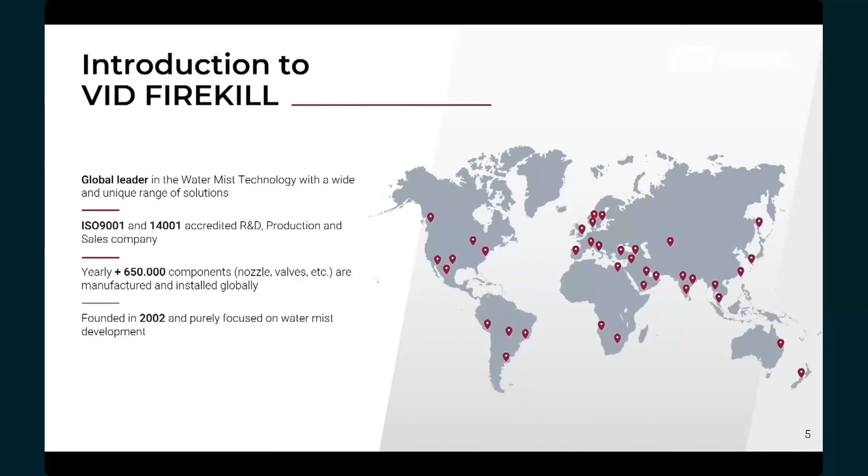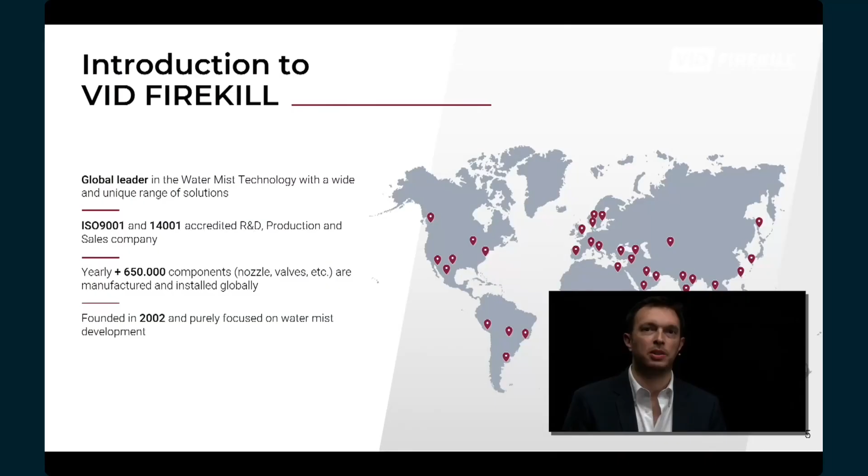So as I said, we are VID Firekill, a global leader in the water mist industry, working for more than 20 years, purely focused on low pressure water mist development. The company is wide and full of all the ISO approvals needed as a global manufacturer. Just to give some numbers, we are producing almost 650,000 components, sold and installed every year globally.

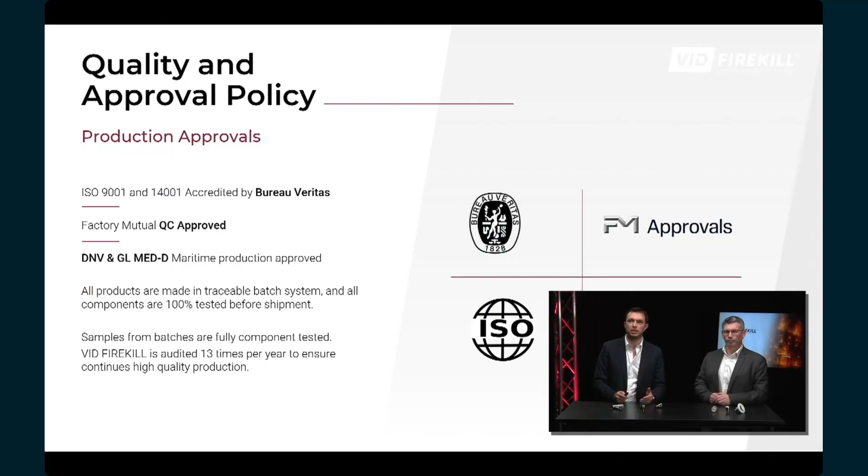The company is purely focused on a strong quality and approval policy. Apart from ISO, there is a strong relation with FM Approvals in terms of quality, testing, and research and development, but also within the same specific product, because all products are made in traceable batches and are all 100% tested before shipment.

That means that for a customer, it's a wide and reliable technology in terms of quality and performance in general. Just to give some numbers, it's audited around 13 times per year by different auditors to ensure the best performance in terms of quality and performance.

Giving some numbers, it's approximately 13 FM approvals, different DNV approvals, mainly for marine applications, but also VdS approvals, mainly covering EN14972 in Europe, but also civil defense approval covering the Middle East.

Apart from the approvals and the product, the company has a strong commitment to the industry in terms of participating in standardization, being an active part of CEN, NFPA, and IMO Solas. As a company, as a manufacturer, we truly believe that being part of the industry means also being part of the standardization process.

But also being part of committees and associations, like being part of the FM Approval Manufacturer Advisory Council, being part of IWMA, representing water mist globally, being part of the European Fire Sprinkler Network, but also FSSA in the United States.

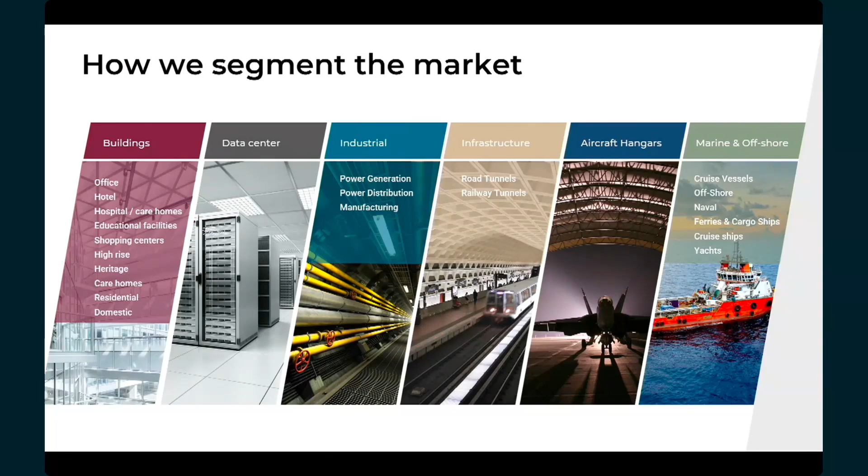This helps the company be an active part of the industry, but also be able to be part of different markets worldwide, like buildings, offices, hospitals, wooden buildings, historical buildings, heritage, data centers, industry in terms of power generation, power distribution, manufacturing, road and railway tunnels, aircraft hangars, but also marine and offshore. So it's a wide, extensive range of products present worldwide, working in different kinds of markets and applications.

But now I think it's time to go much more into the topic, and I want to leave the stage to my colleague Olivier. If we look at FM, Olivier, why is FM really key and why is FM really important in terms of standards?

Yes. FM is the main company to test water mist.

So, because it was the first one to create the test, the protocol test is the FM 5560. It's the protocol where you can find a full case test for a lot of things. I will introduce this after.

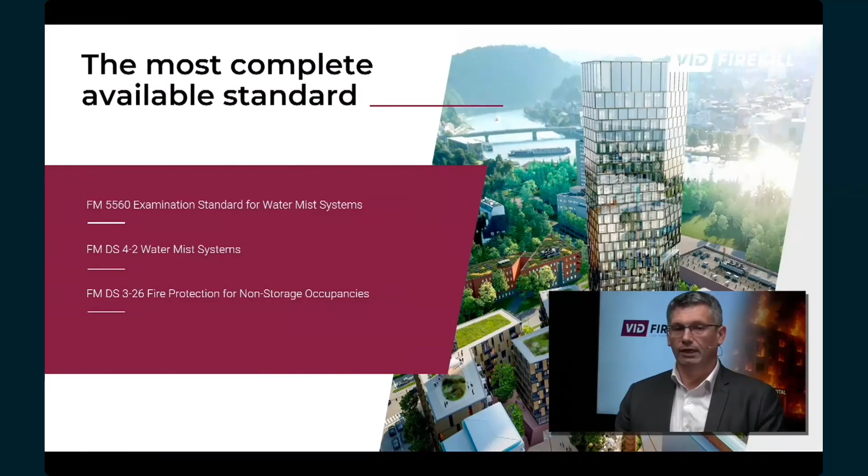And FM also has a lot of data sheets. Data sheet 4-2 is mainly for water mist, for the product, but also for the design, installation and after-sales activity. There are also data sheets for the application. Yes, this data sheet is the 3-26. It's really important because you have the classification of all the risk for the building.

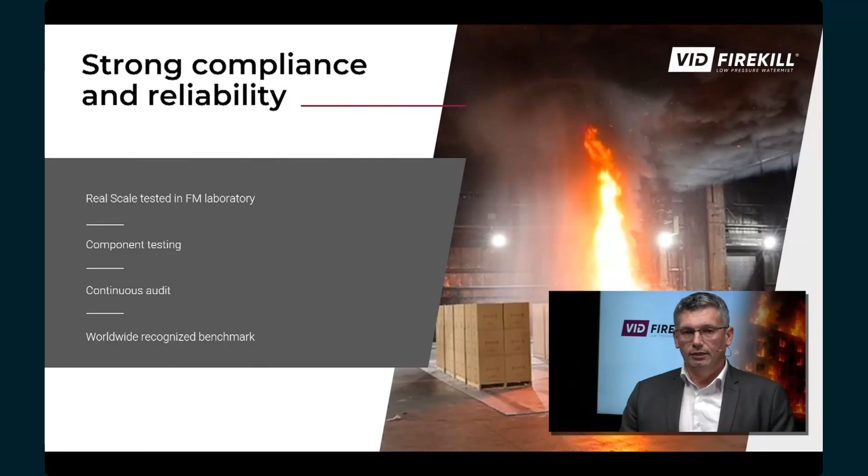So FM also has all the premises to do the tests. You can do the fire test for the component, and it's also an auditor company because they go to the factory to control if all the process for making nozzles, making pump units, is in accordance with FM. And FM is the main assurer over the world, totally recognized and a benchmark for all the other assurers in the building industry.

So now let's go more in depth for hospitals. The benefit of using water mist for hospitals is really significant. You have the benefit of saving the people, the patients and the persons in the building. It's really important, and it reduces the smoke emission because the water mist starts at the beginning of the fire.

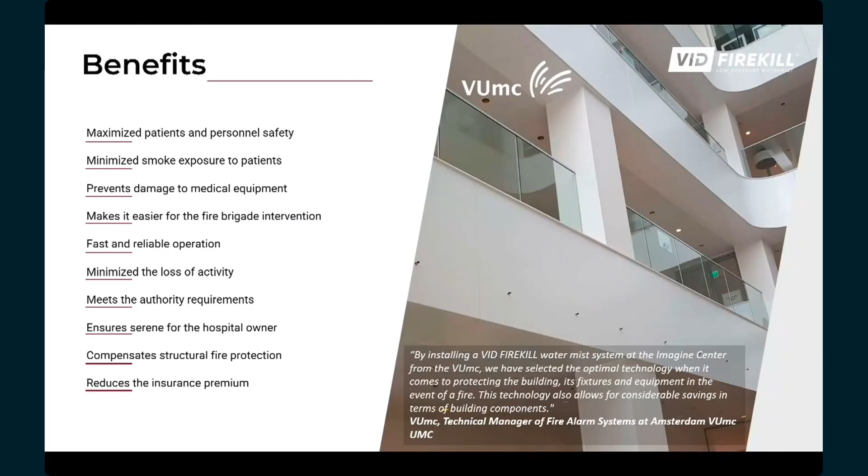And as it starts at the beginning, the fire is too small. There is less smoke, and smoke is the main thing that kills people. So if you reduce the smoke, the people and the patients are safer.

It's also good for the owner, because the owner has more confidence in the building when there is water mist installed. It's also good for reducing water damage. When you have protection on the building with a water system, water mist is the best because there is less water used.

Also for the insurance, it reduces the cost of the insurance. And depending on the country and its rules, you can reduce the smoke extractor, or you can use the water mist to replace the smoke extractor.

And it's the same for the structure, for the fire resistance of the structure. If you know, hospitals are sometimes very old buildings, so you can use water mist to compensate for the fire resistance of the building. Maybe I've missed some benefits, Ricardo.

Yeah, but this is great, and you see the benefits are really amazing on that side. It's not just unlocking different benefits in terms of fire protection, in terms of water saving, of course. But I think the main topic you touched on is the most interesting one: the management of smoke, the activation when the fire is not that big, the faster reaction against fire.

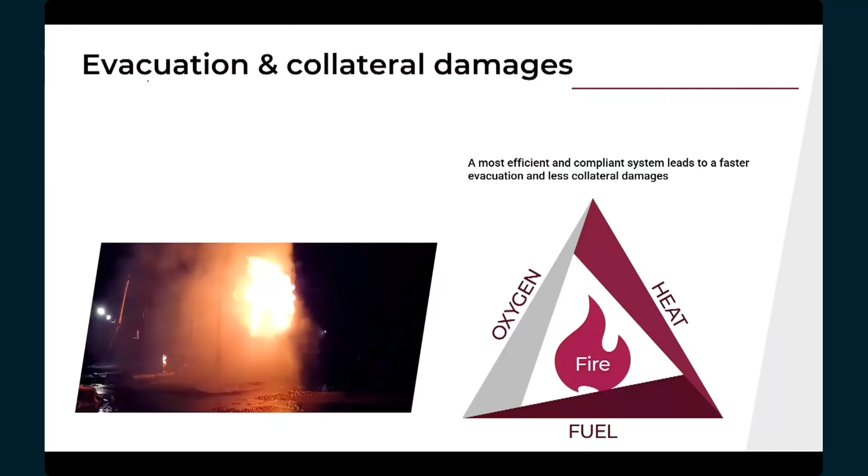Because if we think about sprinklers, we think about just absorbing heat energy from the fire, using water, which is the most known element in nature for absorbing thermal energy, to absorb heat and control it. When we use gas suppression, we mainly reduce the oxygen. But when we use water mist, we work on both sides of the fire triangle: we absorb heat from one side, but we also stop the oxidation. That means being able to be much more reliable, much faster in control and suppression.

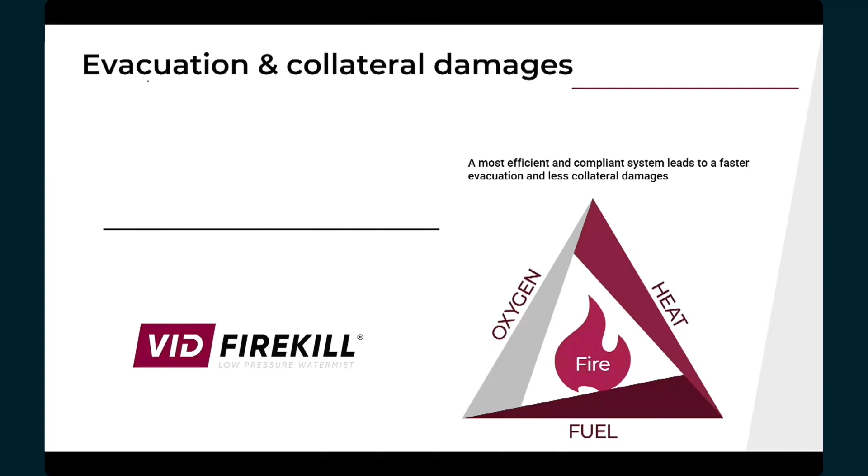At the end of the day, it means evacuating, it means controlling smoke, it means controlling fire, it means preventing collateral and structural damages. So it's a wide, extensive range of benefits, of course. And now, thanks to FM, with the new approvals released by FM in Appendix P, the HC-2 and HC-3 are unlocking the chance to really swap from a traditional application-based use of water mist to an occupancy-based use of water mist.

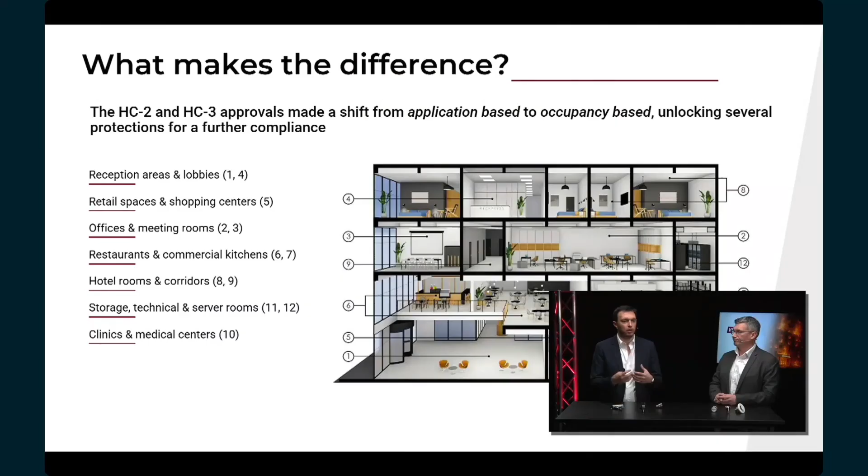If we look at the old protocols released on water mist, and we think about OH2, there is an OH2 risk for sprinkler, which is covering a wide range of application. But if you look at OH2 for water mist, it's just OH2 car park. It's not OH2 or anything else.

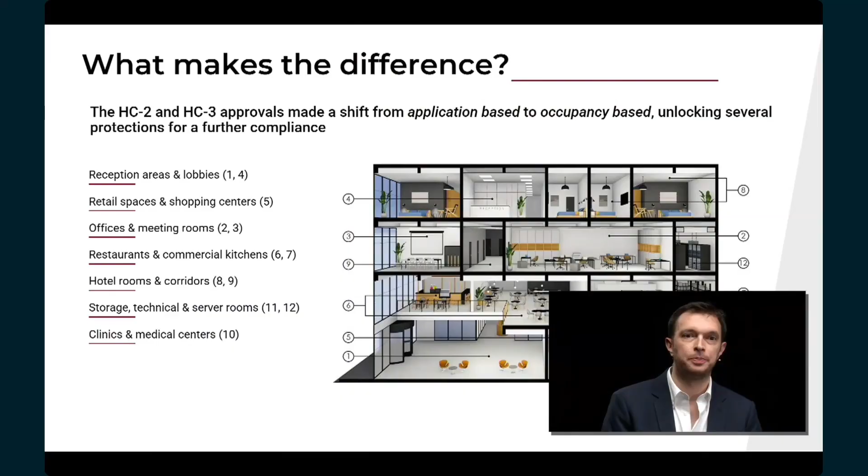So it's purely focused on the application, and you have to apply that test specifically for that specific scenario. When it comes to occupancy base, then it's a wider, extensive coverage. And if you think about HC-1, HC-2, and HC-3 areas, we can really look into a full building protection, which is much easier to apply and get local compliance because it's covering a wider range of hazards. Of course there are limitations from testing, but the application is much wider, and can be reception areas, retail spaces, shopping centers, offices, meeting rooms.

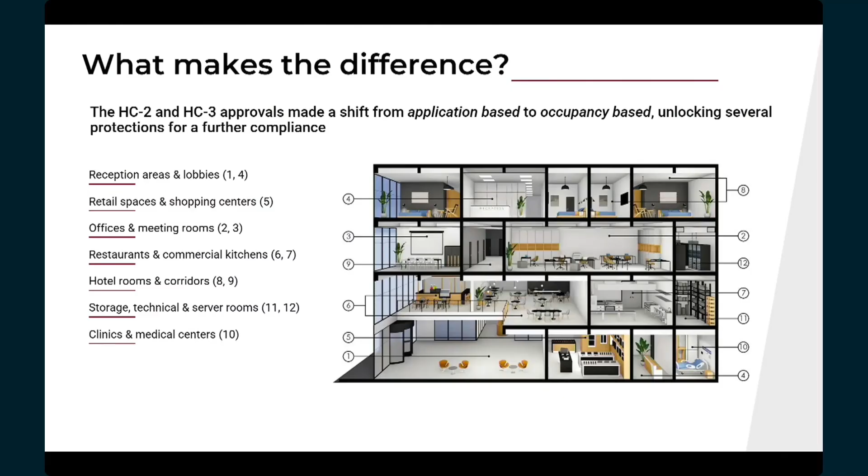When it comes to hospitals, it can also be generator rooms, laboratories, any kind of room used for surgery, or simply rooms for patients. So it's wide and easy in terms of compliance because of that.

And just an example, when it comes to application base - I think this is where we gain the benefit working occupancy base. If we think about cars, how the fire load and composition of cars changes around the world, and if we think about the OH2 car park fire test, which was limited to an old generation of cars, what's happened with the new ones?

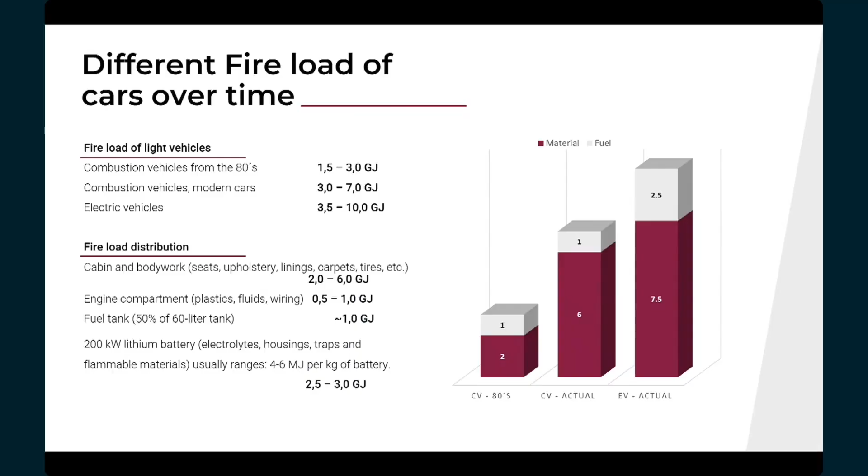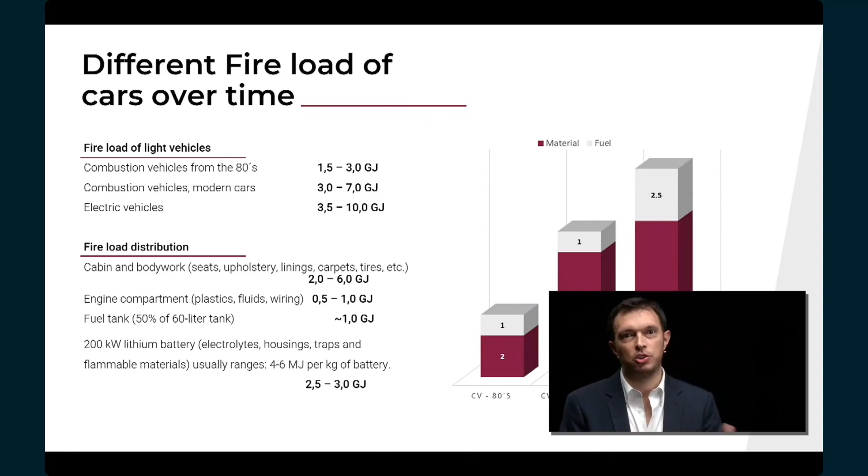If you look at what's happening with car development and the type of fire load and how it was spread across cars, we started in the early 60s or 80s, where metal was the main component inside cars. Then fuel was a component increasing that fire load. But we jumped into a new generation of cars in which plastic is taking the lead - there is much more plastic than in the past.

And if you look at what's happening now, and what will happen in the future, there will be an extended use of electrical equipment, but also lithium-ion batteries for EV cars, in which the fire load is increasing and increasing. So how can we stay stuck on a simple application-based test when we have a full occupancy classification?

And that's what happened, for example, within the FM approvals. Being occupancy-based means that if we increase the fire hazard, if we increase the fire load, we can swap to a greater fire design, like from HC-2 to HC-3 for cars and parking garages.

And if we have a test for OH2, which is simply done for application, then we have no room to go to OH3, because OH3 in Europe cannot be used for cars - it's a test done for shopping, sales, and storage areas, which is completely different in terms of application. And I believe that's one of the biggest benefits.

And I think it's good also to run through what HC-1, HC-2, and HC-3 mean, how they can be applied, how FM sees them. I think it's a good time to run through a bit the HC-2, HC-3 application, because classifying occupancies is so important - let's go a little bit more in depth.

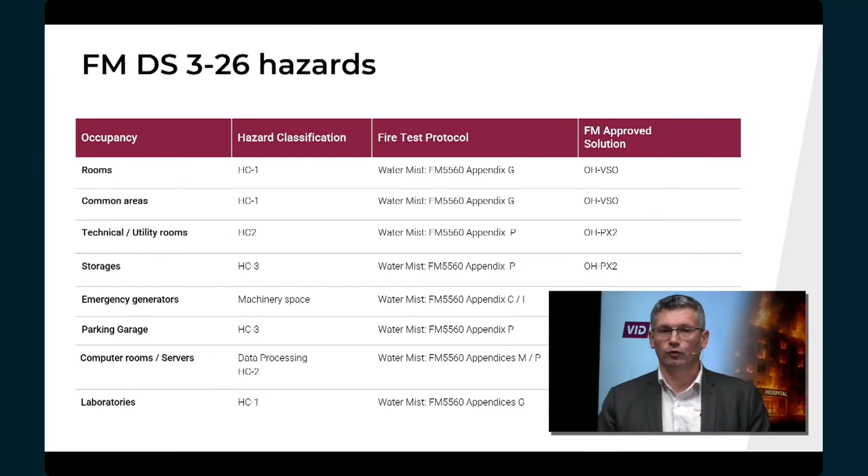For the room, we have the classification HC1. For the common area it's HC1. For the technical room, you have HC2, sometimes HC3 as well, depending on the technical room. Storage room, for example, for the pillar in the hospital - you have storage a lot of the time, and it's HC3. So as you can see, all the rooms have a classification.

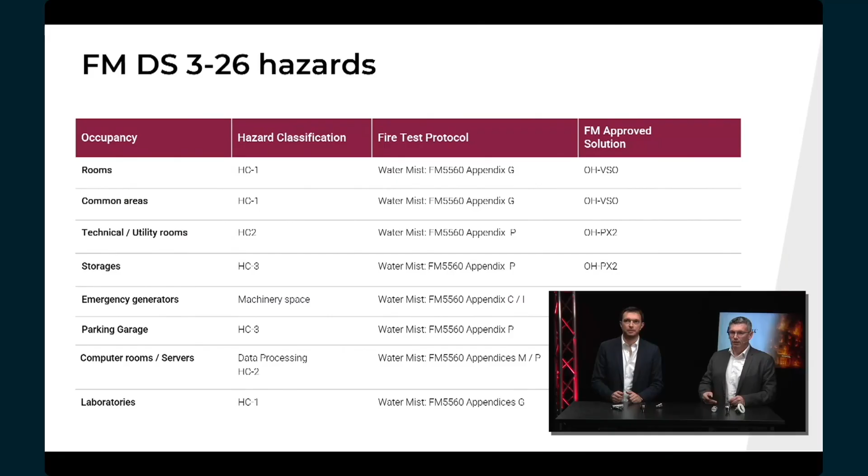So if we go to emergency generators, it's machinery space or local application, depending on the size of the room, how many generators - we will see more after. For car park it's HC3.

For computer room, we have data centers, processing tests, and for cable on the corridor as well, you use HC2. So in the laboratory it's HC1, depending - sometimes we can go to HC2, as you have explained.

We have classification with FM, and we can move from one classification to another if the risk is bigger. So with FM, the good thing is also that when you use sprinklers, you use square meters to define the size of the pump.

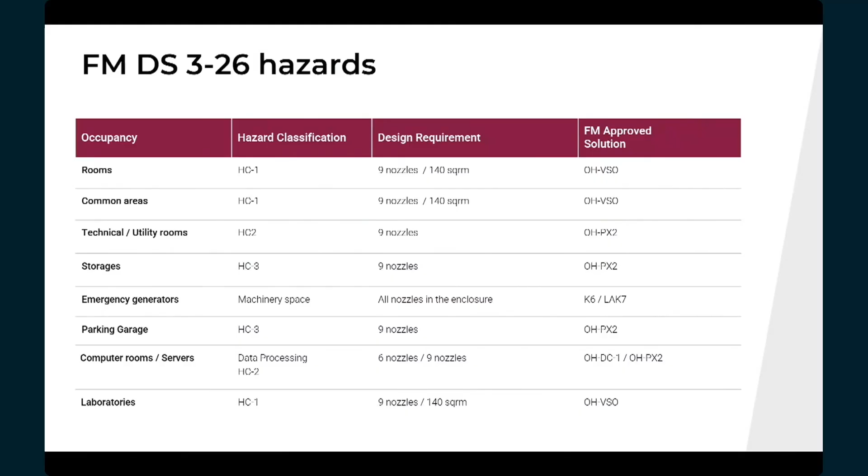FM was the first to introduce this test, based on the test and the number of nozzles. For water mist, when you have the test, you take the number of activated nozzles and multiply by 1.5 to define the nozzles for the pump unit.

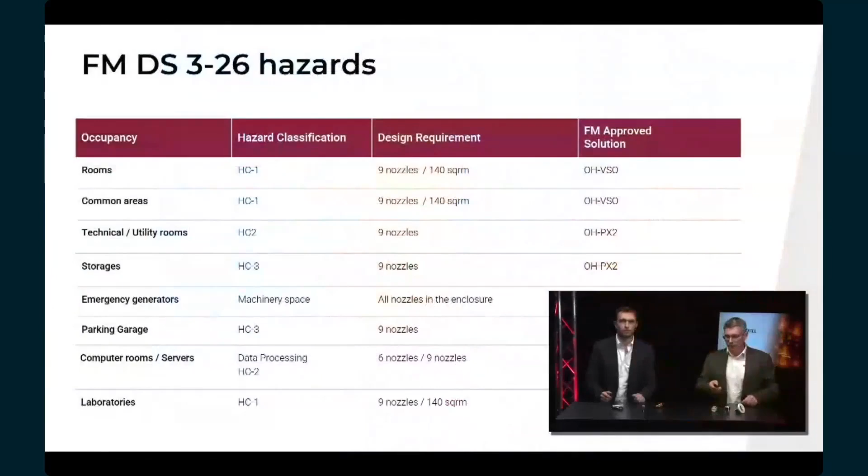FM uses this approach because the heat radiation is totally blocked by the water mist, so we activate fewer nozzles and sprinklers, and we get the full benefit of water mist. Let me explain in detail. For standard rooms, the pump unit only needs 9 nozzles.

That's for 150 square meters - sorry, 140. For HC2, we have only 9 nozzles because when we did the test, we activated only 6 nozzles. It's the same for storage, with 9 nozzles, and for machinery space - the space of the room or the size of the generators.

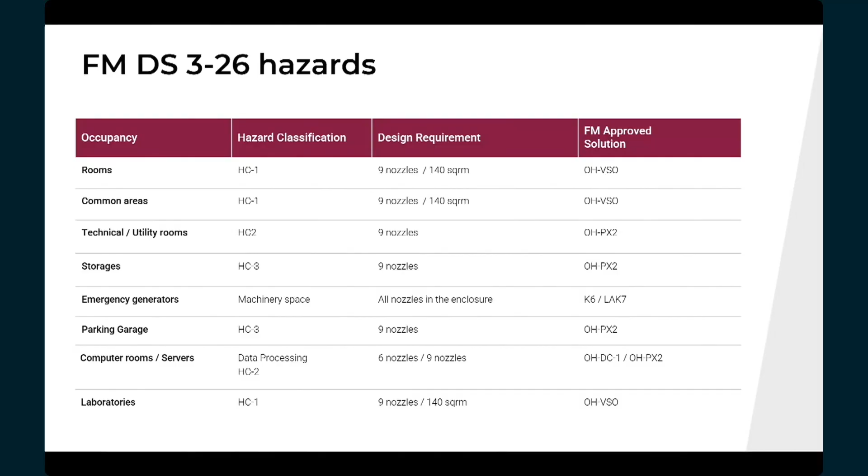Parking garage is the same, 9 nozzles, and laboratory is only 9 nozzles for 140 square meters. For data centers, the room only needs 6 nozzles because when we did the test, we activated only 2 nozzles, and the minimum is 6.

I think one interesting part is that when we move to a nozzle-based design, we also change the design criteria so that water mist is much more flexible. When you design for OH1, OH2, OH3 related to a surface, you need to count how many nozzles are in that surface. If obstructions lead you to need more nozzles, you may end up with a water storage or flow rate that's too much for that hazard - not that it doesn't perform, but perhaps the system is over-designed.

For HC1, 9 nozzles is the minimum in the design, for 140 square meters - this was the first design in FM, and at that time we stayed with square meters. But after that, for HC2...

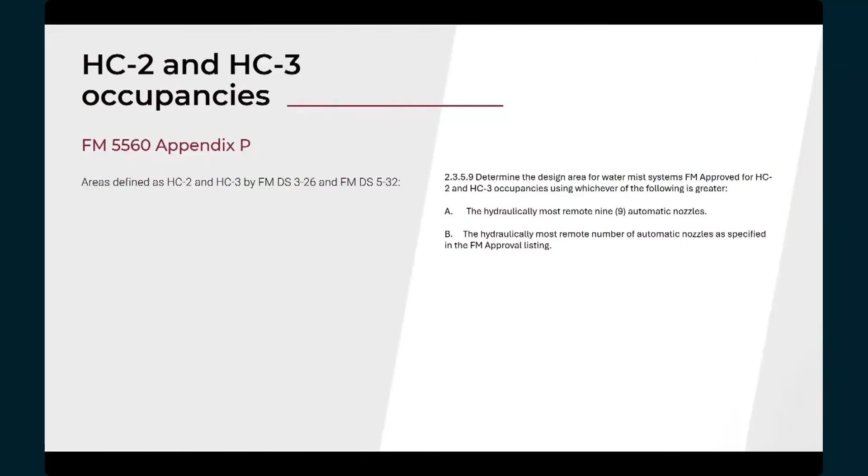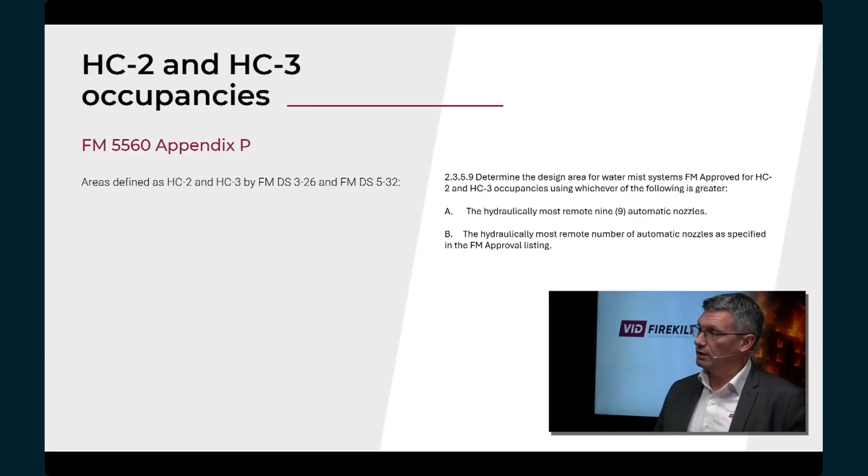HC3 involves one of the tests where the activation of nozzles during the test is really important. When we do the test at 7.6 meters height, we activate only 6 nozzles during the test - and during all the tests, because when we talk about the test, it's not just one test, there are many tests.

I'm not here to explain what the test is, but it's not just one attempt to extinguish the fire - there are several tests. Across all the tests, we activate only 6 nozzles, and that's why we only need 9 nozzles in the design for the pump unit.

Machinery space is another case. There are two scenarios: the first is total flooding, one of the earliest tests for water mist historically - I think it's from before 2000.

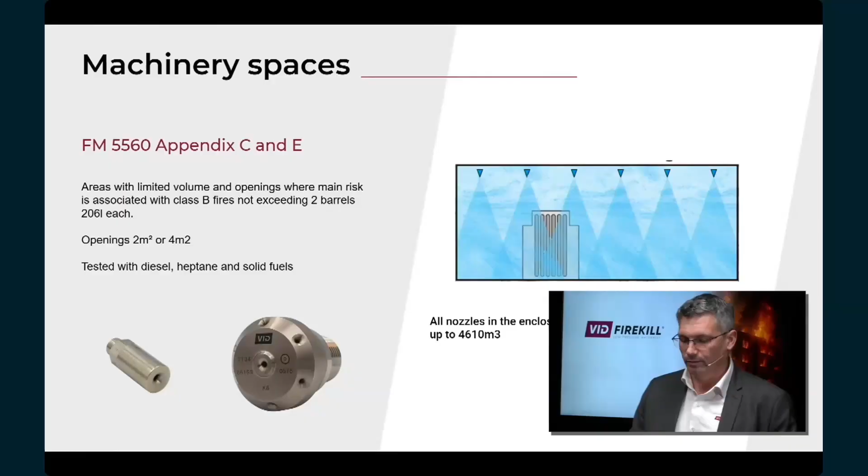Marine applications started when water mist was used to protect engine rooms inside ships. This total flooding test uses, at the same time, cooling and oxygen reduction.

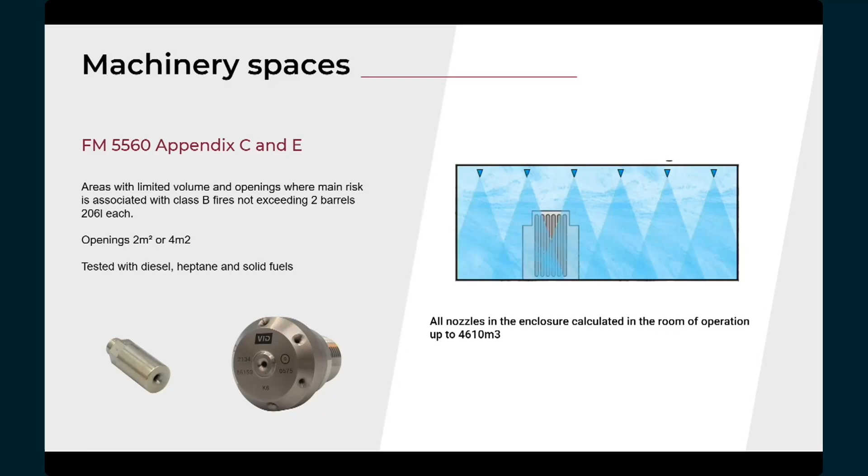One important factor is the opening size. If the volume is under 260 cubic meters, the opening must be less than 2 square meters. If it's over, the opening must be less than 4 square meters. If that's not the case, we have to move to a local application.

It's good to use total flooding when there's only one generator in the room, because ultimately you have to discharge and fill the whole room with water mist. If you have two generators, you might discharge onto one that doesn't need it. So when you have two, three, or more generators, the best solution is local application - you activate only on the specific generators, and you can even do so without stopping the generators.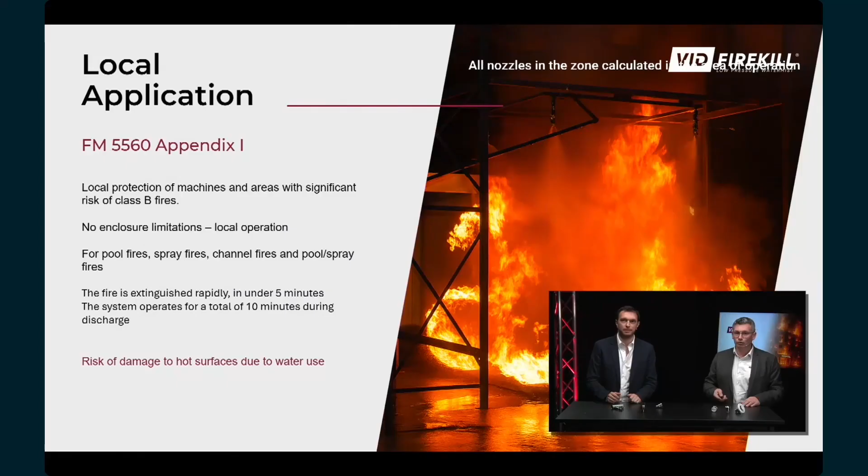Yes, local application is also part of approval by FM. When it comes to local application, Vinod here is the expert in India, and many data centers and hospitals need local applications. Sometimes when we look at data centers in Europe, it's containerized, but in India, as Vinod knows much better than me, they have complete DG building sets, meaning a lot of generators in that building. Being able to localize the discharge is a benefit for the operation.

But when we look at FM in general, there are challenges. Classifying areas HC1, HC2, and HC3 is fine, but there are some applications not covered by any standard, not for sprinkler, and not for gas suppression or other technologies. I truly believe that water mist is the technology that can solve different challenges.

Before jumping into challenges like atriums or facade protection, one slide is good to discuss, because we got many questions on previous webinars from colleagues regarding storages and FM datasheet 326. When you look at 326, the datasheet is called for non-storage occupancies, so is it really covering storages or not? The answer is yes, that datasheet covers storage, of course, not really big warehouses, but some kind of storage that can be classified as incidental. This classification is linked with some limitations.

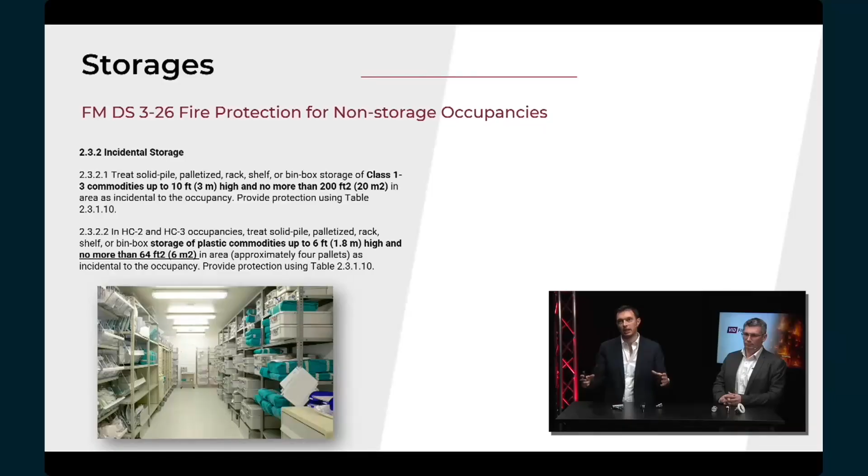For commodity class 1 to 3, the limitation is up to 3 meters and no more than 20 square meters of rack aisle, which is quite a lot if we look at 20 square meters of rack compartment. The same applies for commodity class 4, though we need to go a bit lower in terms of storage height because it's a different fire load, but there is also 6 square meters of rack compartment.

When we talk about hospitals and buildings, those limitations are easy to match. The same is true for data centers and many applications. Of course, when we talk about large warehouses it's different, but for buildings it's quite easy to manage. It's important for the customer to understand the limitations to stay within, to be fully compliant without issues from the fire brigade or the authority having jurisdiction. The same applies for high-density movable shelving units.

Hospitals, especially the old ones, have a lot of clinic folders that have to be stored somewhere and kept for a certain number of years - in some countries even 10 years, for others up to 20 years. Some are digitalized with several rooms inside, but some are not, especially the old ones. So storing them means creating archives, and the best way is to use high-density movable shelving units because they are quite compact and able to contain a lot of files and folders. This is something FM also looked into.

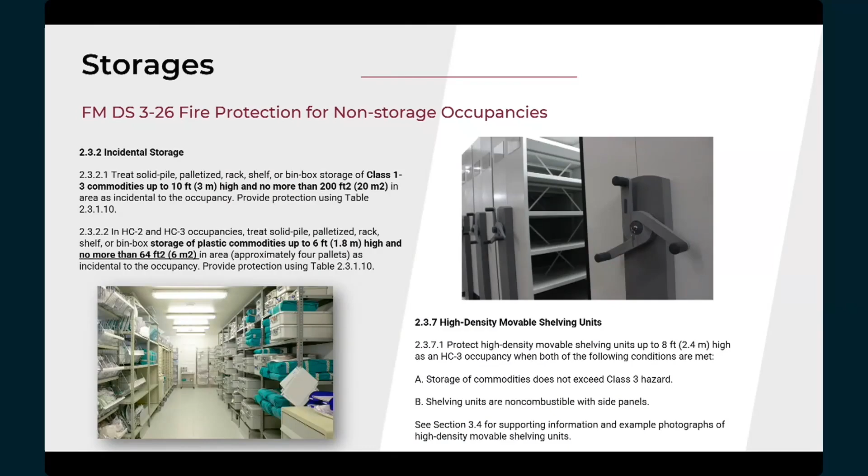When we look at OH1, EN 14972, or NFPA, there are some limitations and declassifications, but it's not always that clear. When we look at FM, it has a specific chapter inside 326 expressly explaining how to protect them, giving limitations. The usual limitation is 2.4 meter ceiling height, which is quite flexible because normally those shelves have to be easily accessible for people, with no need for stairs. So 2.4 meters is quite easy to do, and there is no limitation on surface when deploying them.

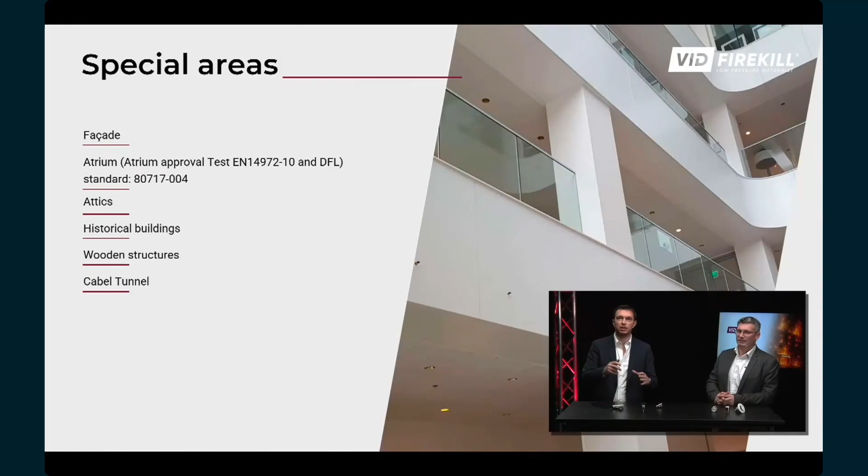So it's quite flexible also on the storage side, I would say. But then there are special areas also - facades, for example, atriums, large atriums, some attics, wood parts - and Olivier will tell us much more about wooden structure protection, which is a special application that is growing and growing much more, specifically in Central and North Europe, but we can expect it's growing worldwide too.

This is a pure example of why WaterMist can go beyond everything the standard was planning in the past. Let's suppose we are entering a hospital. We have a large lobby area, a large atrium, perhaps even 15 or 16 meter ceiling height, or more than 12. We know that when we are more than 12 meter ceiling height, it's just impossible to detect the fire, because to trigger that nozzle we need a really huge fire. And if we have that huge fire, then we have a bigger problem than the fire protection system.

So going into an atrium approach - that's the specific test protocol not developed by FM, but developed by EN 14972 - it means having something that can support the authority to be much more compliant on atrium protection. It's a deluge solution with nozzles placed alongside the atrium, spraying as you see in the slide, and it's triggered by a fire detection system. The nozzles are placed at a lower ceiling height, ensuring a proper spray.

Many customers ask, well, what about the ceiling? Yes, we can of course install ceiling nozzles to protect just the ceiling, but to have a solution specifically for the atrium is definitely the best practice. It can be done in combination if a customer wants, but this is the best to do. And the same applies for facades, I would say.

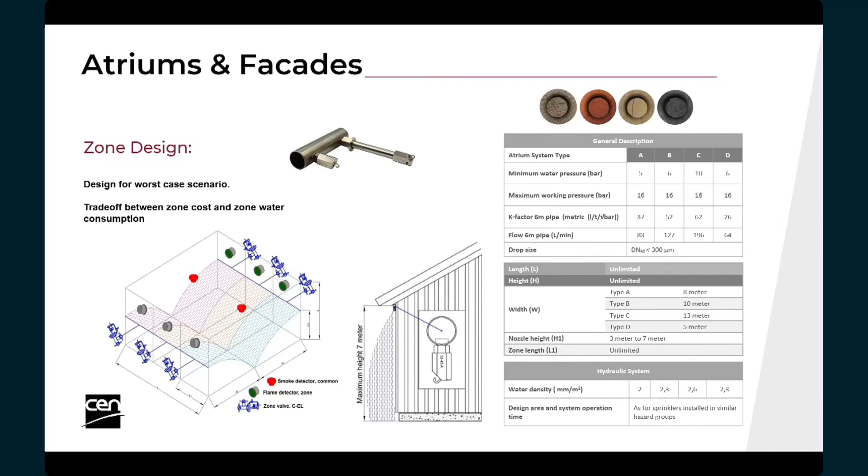So for the atrium solution, you have a spray, you reduce the fire and the smoke really quickly. For hospitals, this is used a lot of the time because hospitals have a big entrance or hall, and this part is like the heart of the hospital. If you have a fire here, everything is stopped. So you have a lot of time to protect the atrium.

Imagine also discharging dirty water on critical items like the surgery rooms, or the rooms with radiography equipment. So it's also heavy and expensive items that a false discharge can really damage, and this can cause a lot of cost for the client. So the client maybe even reduces insurance cost - we don't know, but it's a question and discussion of being much safer in case of any potential false discharge in general.

And I believe the wood building is also quite an interesting topic. Yes, it's an interesting topic today. In Europe we try to have less CO2 emissions, so a lot of buildings now arrive in wood. But it creates a new risk because it's not only the desk or objects in the room - before, the building was in concrete, so there was no fire on the concrete. Now you can burn also the building itself, so that's one of the problems.

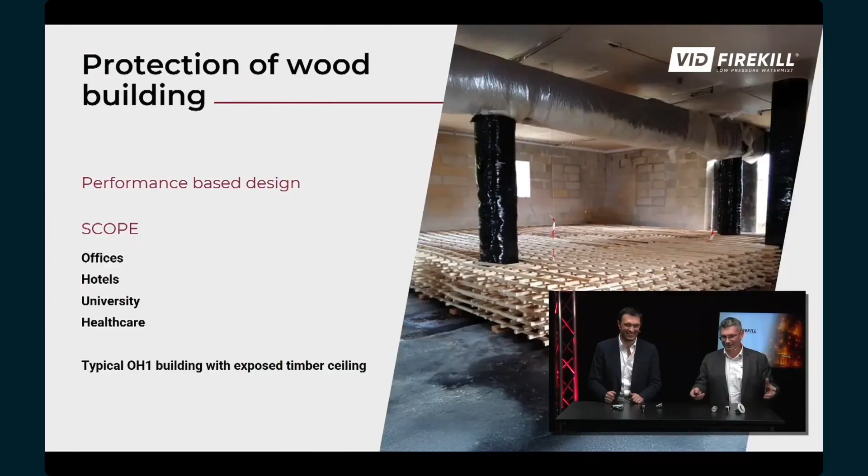But water mist is a good solution because there is less water. On a wood building, if you put a lot of water, you have problems also with the wood - it doesn't like the water. So today we have this sales case and opportunity with office, hotel, university, healthcare, retirement home. Sometimes it's an extension of the building - you can put 2 new levels in wood on the building because it's not heavy.

So we have done some tests. The first test we have done is with the CERIB, to see what happens on the ceiling when you have a big fire and you protect it with water mist.

If you see on the picture, there is not a lot of damage, just the color and a few millimeters. I think it's less than one millimeter of damage. I believe the damage was done before the discharge, it was perhaps coming from the fire. So it's a really good solution.

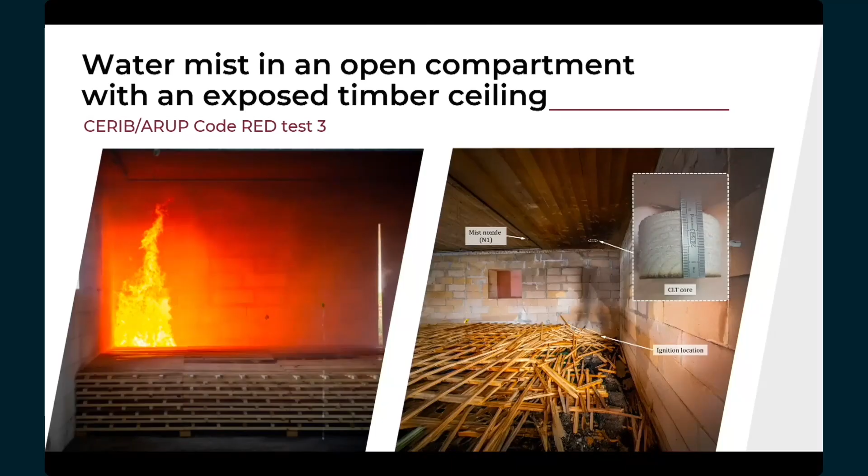It's a good solution for the room. In concrete, we control the temperature of the fire, we control the damage due to the fire, we control the smoke emission.

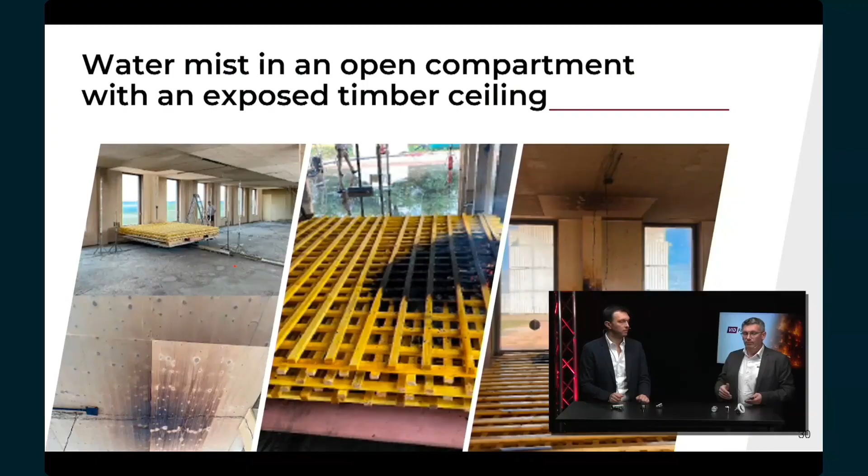So we have done another test in Effectis for open space, with sidewall nozzles. It's a big challenge because when the fire starts, you have sidewall nozzles on the wall, and you don't know which nozzle will be activated first. But if you see the picture, the damage is really less with water mist, low pressure water mist VID, and we control the fire for sure.

This is not only a ceiling, it's a wood structure building, so there are pillars and beams, always in wood. The challenge is that there is no damage on the structure, because when there is a fire in the building, the fire brigade have to go into the building and stay safe, yes, to save the people. So that's the case.

I think also if you look at those kinds of buildings and the type of nozzle used, the sidewall for example, the architects are always trying to optimize the aesthetic point of view, and that's sometimes the case. So we as engineers, I'm not saying we don't like the architects, but we have to deal with them sometimes.

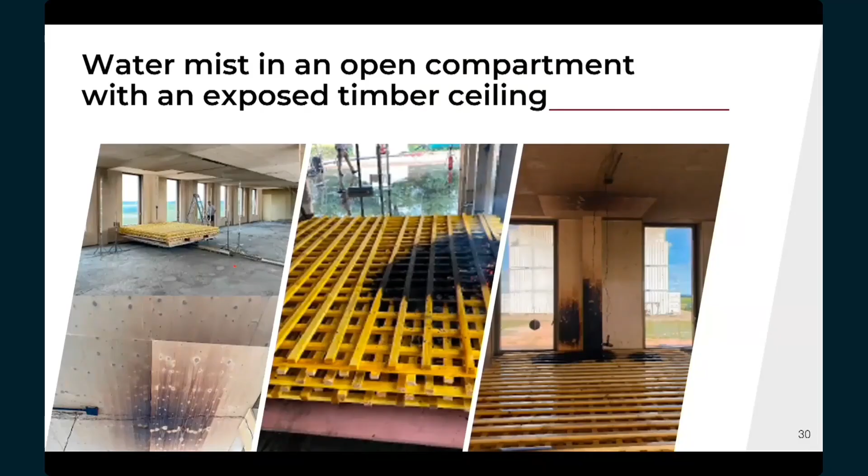If you look at this kind of scenario, the fire is growing far from the nozzle, and if we think about the sprinkler system, for example, the activation time will be much longer. This will help guide you into a quick sum up of the benefits of water mist.

If we think about water mist in general, it's not just activating faster, but of course it's saving space in general. At the end, as we saw regarding specifically the hospital, it's a heavy property loss saving, because if you think about sprinkler discharge, dirty water plus smoke, with sprinkler there is much more smoke and much more property loss with a traditional system, and water mist can really trigger those benefits for the customer.

Of course, if we compare also about high pressure water mist, it's much less power working at lower pressure because we are much closer to the sprinkler pressure. That means for buildings such as hospitals, where power is needed for emergencies, we are not really taking too much of that power, and we leave the power for the emergency or for the operation in case of a lack of current, for example. This is quite important.

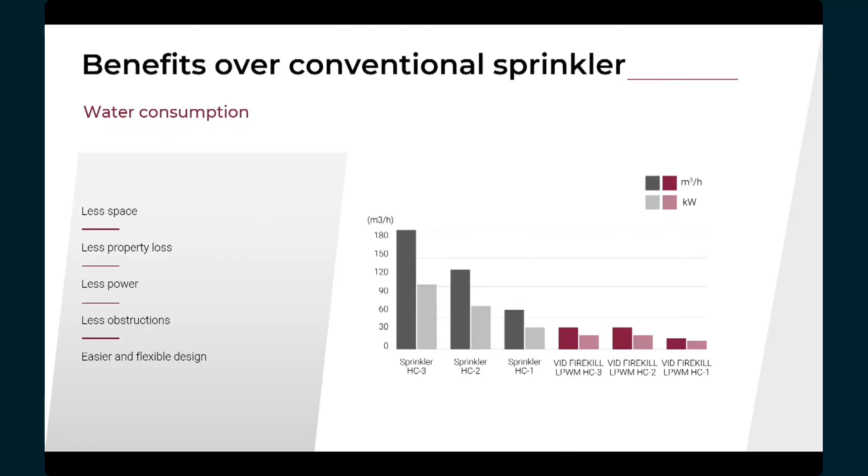And of course, the management of obstructions is different compared to sprinkler, and if you look at the design itself, it's much more flexible and also easy. We know that for hospitals, construction time is also important, because the faster we can build, the faster we can host patients.

The hospital is a new building for sure, but the main park of buildings today is old, and not all of it is protected. So water mist is a good solution to integrate into buildings already existing, where the false ceiling has no enough place for a big pipe. That's right, so water mist is a really good solution to protect existing buildings.

And of course, in a world where everyone is looking for much more sustainability, more sustainable construction materials, water mist is of course a greener solution compared to a traditional system, which uses different types of pipes in terms of diameter, but also in terms of wall thickness. Because if we go with black steel or galvanized steel, the wall thickness is much different compared to stainless steel. But apart from that, there is also a lifetime consideration, because stainless steel is much purer and the lifetime is much longer.

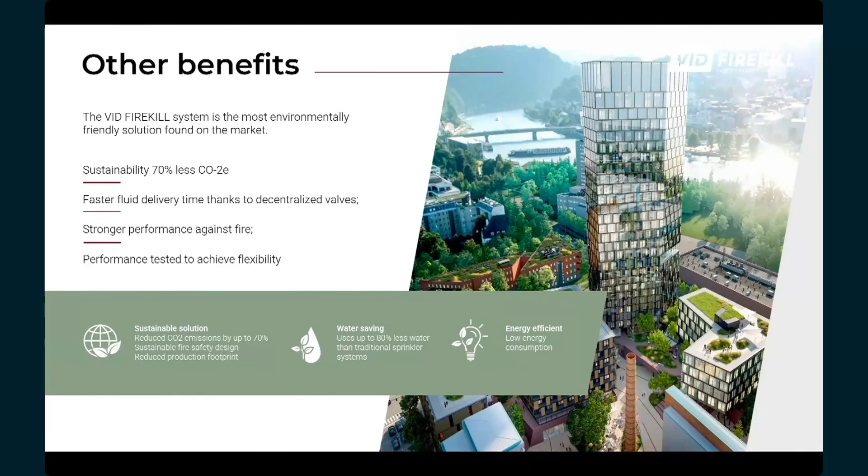All those combinations together, with less power, less water, together also with stronger compliance and stronger action against fire, will lead water mist to really be a game-changing technology for the future.